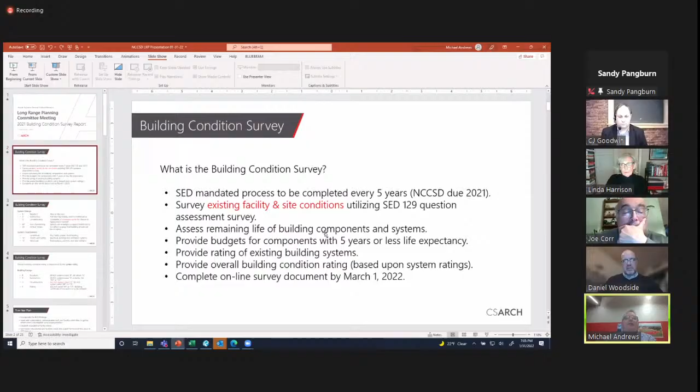Some of the ratings and things we're looking at: there's a system rating for different components of each part of the building. The systems that we look at are anything from play fields to heating systems to columns, foundations, windows, doors. We have to rate each component as E for excellent, S for satisfactory, which means it's functioning reliably with routine maintenance, U for unsatisfactory, which either means it's unreliable or it's exceeded its useful life and repair or replacement is needed.

It's non-functioning, or CF, critical failure. If you have a critical failure, that's about as bad as it gets. The district has no non-functioning or critical failures to report on, so we're in good shape with that.

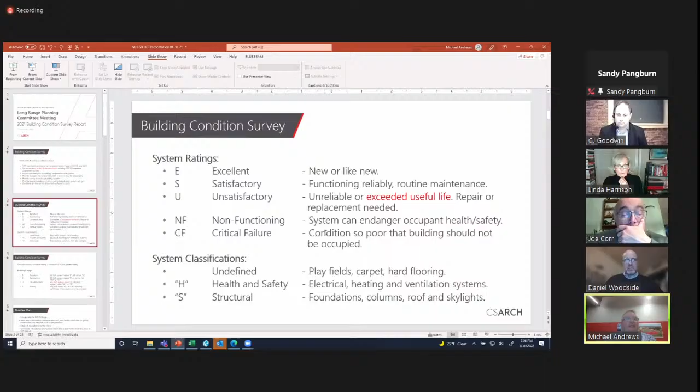System classifications: each one of the individual items that we look at, like playfields for example, are undefined - they don't have a classification - as either being health and safety related, like electrical, heating systems, and ventilation systems, or S as structural, which is for foundations, columns, roofs, skylights. So we look at the systems, and the systems are each classified in different ways.

The overall building condition rating is based on: excellent, meaning all health and structural items are rated excellent. All others are satisfactory - S for satisfactory means all health and safety or structural items are rated satisfactory or better. We have most of the buildings in the district rated satisfactory.

Next is unsatisfactory, which is if any single health, safety, or structural item is unsatisfactory - the building itself falls into an unsatisfactory category. And then failing, which is if a building has any health, safety, or structural item noted as non-functioning or critical failure.

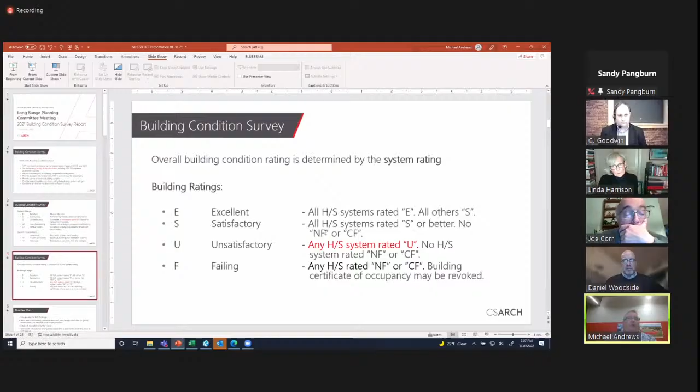If that were the case, when it gets uploaded to SED, they could revoke your certificate of occupancy, and that would affect occupancy of the building. Again, we don't have anything that falls in that category.

The 5-year plan: here we incorporate the building condition survey findings. We meet with stakeholders, administrative staff, and facility committees to gather information and establish work scope. We establish educational facility needs, synthesize them into a plan, and phase the plan in 5 years in an SED format. The executive summary, forwarded on Friday, is submitted to SED.

Along with the building condition surveys that we upload to the portal. So for the facility evaluation reports, which we'll go into detail on for each building, we base those reports on our building observations.

CJ and I walked all of the buildings with Brian Craft, and we looked at every nook and cranny to assess their condition. We also looked at the previous building condition survey as a guide to where we were and where we need to go, and reviewed the district 5-year plan.

That would have been the last one created in 2015, I believe it was updated in 2018. There are also conversations with district administration and staff carrying forward past educational and programmatic needs that may not have been met in the 2017 capital project, so we're still tracking those items to see them processed through.

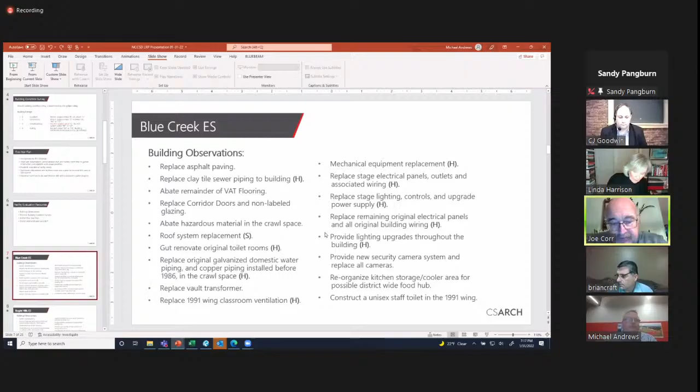Okay, so next building, if there weren't any specific questions at Forts Ferry, I'll go on to Boght Hills. I won't go into detail on a lot of the repetitive items. I'll just talk about some more specific ones that pertain to this building.

Boght Hills, for as long as I've worked for the district, has always had drainage issues in the playing field out in front. That area really needs to be corrected. We need to look at that system to see what we can do to provide better drainage. As part of that, we have an existing storm pipe running out to a structure in that area, which is an original pipe from the 50s that's asbestos lined. So that's a pipe that's going to need to be abated and removed.

We again have more VAT. Boght Hills is one of the buildings—there are a number of buildings in the district that have a lot of the popcorn texture plaster. I'm sure if you've seen it, you'd know the popcorn reference. It's on ceilings, soffits, exterior walls. It has very good acoustic properties, which is why it was installed originally, but it needs to go. We've been taking it out of any areas we found it in the last capital project. A lot of that has been through change orders that have been processed, but anything we've come across has been taken out in the last projects. That's the order we want to go through in future capital projects: if it's in a room, it's gone. There's no reason to keep it. So that's the marching order we're working towards.

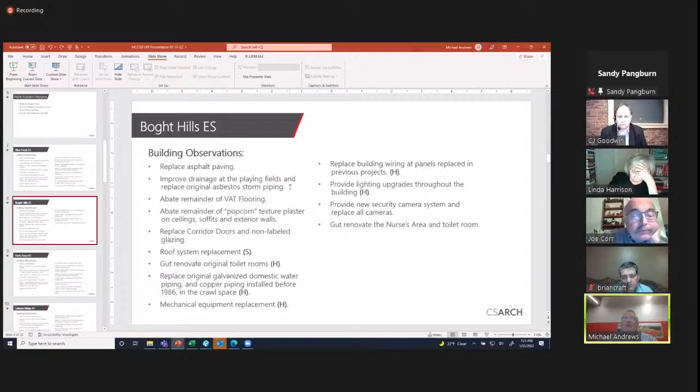There are also corridor doors that need to be replaced, roof systems, renovating the original toilet rooms again, replacing the original galvanized domestic pipe and copper older than 1986. There's mechanical equipment replacements, building wiring, lighting upgrades, security camera work. Boght Hills is also in need of a renovation of the nurses' area and the nurses' toilet room. We've done that in other buildings in the 2017 project—Latham Ridge has new, Loudonville has new, Forts Ferry has new. So Boght, it's their turn.

Any questions specifically about Boght Hills?

For Forts Ferry Elementary School, we have asphalt paving that will honestly always be on the list, because there will always be another section needing replacement in 10 years as things get phased in. So there are areas of Forts Ferry where the pavement does need to be replaced. We have the corridor doors, popcorn texture on the soffits, hazardous material in the crawl space, roof system replacement, gut renovation of original toilet rooms, and we're replacing the original galvanized domestic pipe. There's an old vault transformer that needs to be replaced, and mechanical equipment that needs to be replaced.

Stage electrical panels, outlets, and associated wiring are original there. In Forts Ferry, we also want to replace the stage lighting controls and upgrade the power supply. We want to bring this building up to match some of the other elementary schools with the stage lighting and control systems that have been provided in other buildings.

Replacing original electrical panels that remain, providing lighting upgrades, new security camera system, converting the boilers from steam to hot water and replacing the steam piping, and modifying the tennis court area into a PE instructional space.

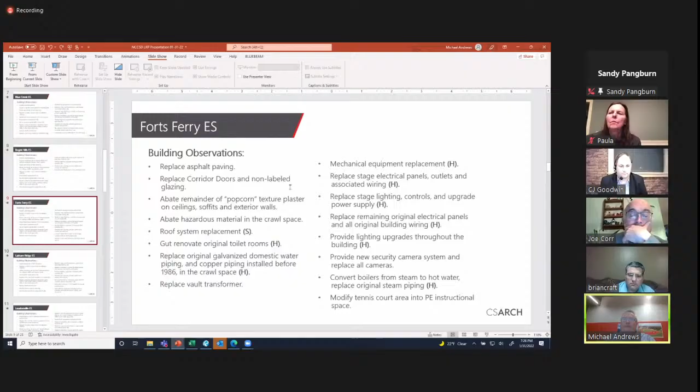So at Latham Ridge, abating the remainder of the VAT flooring, corridor doors, the popcorn texture plaster. There are some roof areas that need to be replaced. Just as a general note for the roofing system, everything that we did as roofing system on the 2017 capital project and moving forward is replacing the complete system down to the deck, evaluating the deck. If we have damaged deck, we replace it, but it's a complete system from the deck all the way up with new insulation. Everything that we do, we want to be sure the district has a 30-year warranty.

So everything installed in 2019, 2020, or summer of '21 has the longer warranties so those are soup to nut, basically brand new systems. We're not patching on top of an old problem. So the approach did change from past projects where we're chasing leaks, to really the system has reached its useful life. We're going to replace it with code compliant proper insulation, which also nets you better energy savings in the building. Because once you bring new roof, meet new energy code, and bring 5.5 inches of insulation up, you are increasing the performance of the overall building. So that's something we've been doing and would continue to do with the district.

At Latham Ridge, we have a vault transformer. In the kitchen, there's a grease trap that needs to be replaced, mechanical equipment replacements, replacing stage electrical panels, original electrical panels, lighting upgrade, the camera security system, and renovating art room 32 for updated program requirements.

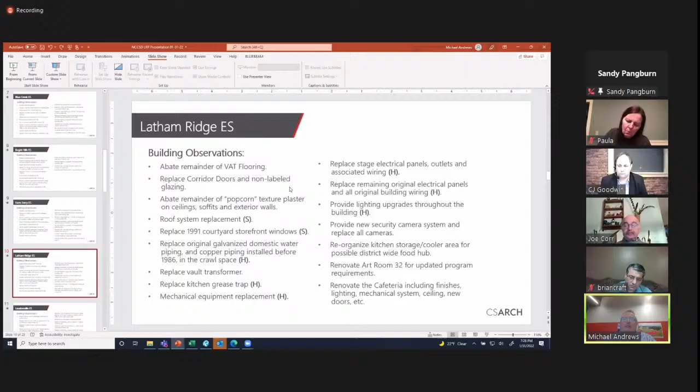And then renovating the cafeteria at Latham Ridge. The space is dated and would do better with updated lighting, mechanical systems, new doors, ceilings. It's a space that's ready for an update.

Any questions at Latham Ridge?

So Loudonville Elementary School, repairing and replacing storm damaged structures. These are catch basins that pick up rainwater in the ground. So these structures are some that need to be replaced.

We have an existing exterior site stair which goes from where the new main office is up to the playground area. That is not in great condition and should be looked at for replacement. That is a structural issue from an S category.

Corridor doors, there is still some popcorn texture. There is hazardous material in the crawl space. There are areas of the roof that need to be replaced.

So in the past project, in the 2017 project, when we've replaced or renovated specific classrooms that had the flooring, we did go in and provide a traditional VCT like we would in other floors. It's beautiful old wood flooring, but it's lived its life.

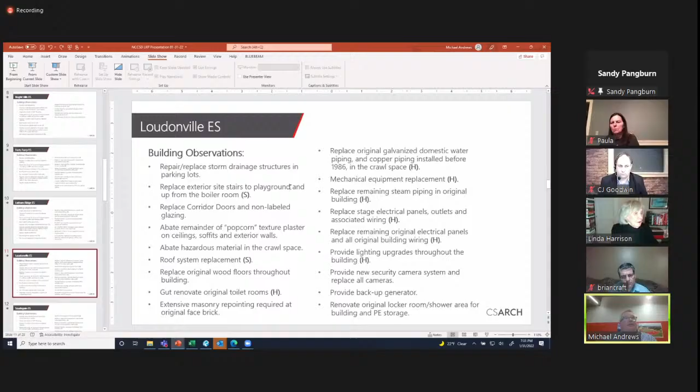Southgate Elementary School, we have repaving of the lower parking lot and tying the storm structures in the lower parking lot into the municipal storm system. Abating the remainder of VAT flooring, corridor doors, plaster texture, roof system, original toilet rooms. There is a cooler freezer at Southgate that needs to be replaced.

Southgate is, I believe, Brian, the only building in the district where we have VCT that was installed in the early 90s, which 30 years in now is showing its useful life. So we're pulling original VAT out of buildings from the 50s, and the replacement VCT is starting now, 30 years later, to show wear. This is the only building where we've had that, but again, the material can only take so much recoating and finishing. That's going to be something that, as we go on, is going to show up more in buildings 10 years, 15 years down the road.

Galvanized domestic water piping, mechanical equipment, stage electrical panels, original electrical panels, lighting upgrades. We have a grease trap that should be replaced at Southgate. And at Southgate, there was a request to construct a unisex staff toilet room in the 2005 wing.

Any questions at Southgate?

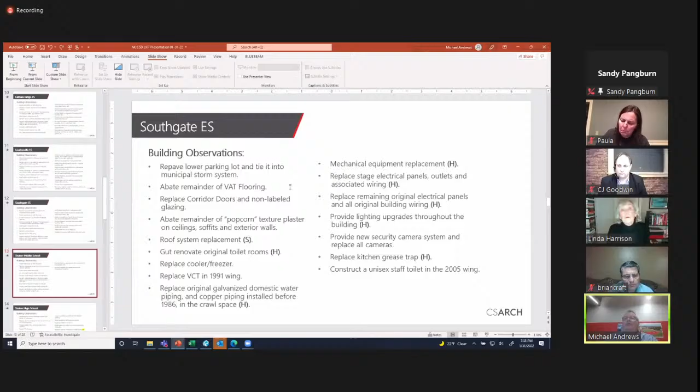Shaker Middle School: there are a handful of rooms left that have VAT. The majority of the building was taken care of in the 2017 capital project. There are some corridor doors and non-labeled glass that remain in specific corridors.

There is roof area that needs to be replaced, specifically over the gym and the library. Those areas weren't replaced in the last project. Also need to renovate original toilet rooms—there are a few of those left in the building.

Replace the 2000 vintage cooler and freezer. Replace original galvanized domestic water piping. There is some mechanical equipment replacement existing, and some original domestic water piping that we want to replace.

Building wiring that goes back to old panels. Some lighting upgrades in rooms we weren't able to capture in this project. A newer request was to provide multiple art display enclosures throughout the building, so there are places to present artwork in code compliant ways in hallways.

Any questions on Shaker Middle School?

Shaker High School is— Mike, can I just add one thing? When we're talking about replacing the piping in the buildings, the lead water testing made it obvious that Shaker Middle School, with the amount of work done, was our best tested building. We had one failure, and it was a very old faucet that was just left behind. So while not all of it was replaced, it was easy to see the work done made a big difference compared to the other buildings.

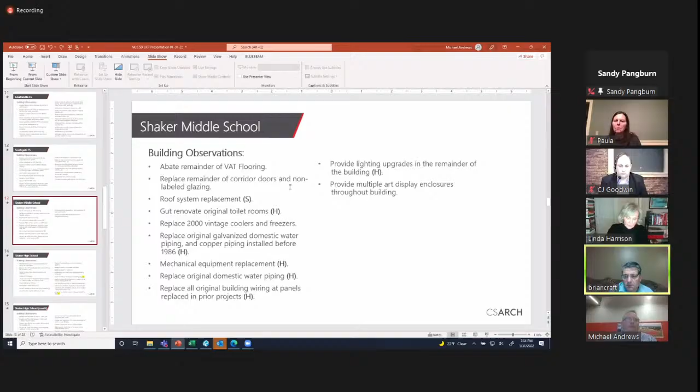For Shaker High School—Shaker High School had the least amount of work done to it in the 2017 capital project, so there are a lot more items from 2015 that are still carrying through today.

There is repair and replacement of storm drainage systems and pavers in the courtyard. There's repaving of the student parking lot and pavement near the receiving area. Replacing Walker field lighting system and controls—something we need to keep on the forefront of costs for the future.

Abating VAT flooring in a number of rooms. There is a considerable amount of popcorn texture plaster on ceilings, soffits, and exterior walls in the high school. There's also some transite panels in ceilings.

Roof system replacement is extensive. There's a lot of roof area that is in really, really poor shape at the high school.

Replace the skylight and curb at Taft Cafeteria. Renovate the original toilet rooms, replace corridor doors and non-labeled glazing, replace the existing dishwashing system, replace coolers 1 and 2, and replace the chairlift in the existing building lobby.

That chairlift is getting close to its useful intended life, so we should be tracking for that to be replaced probably in the 5 to 10 year range.

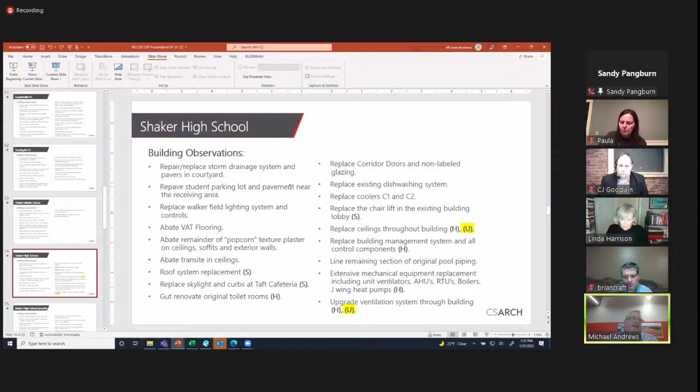Also in the high school: replacing the sanitary lines for areas C, J, and G. Replacing the sanitary line between the G wing and Lafollette Cafeteria. Replacing the transformer serving the front half of the building. Replacing all original building wiring at panels not already replaced in past projects.

Replacing the remainder of existing electrical panels and wiring throughout the building. Lighting upgrades throughout the building. Again, the domestic water piping needs to be replaced. Also the grease trap in the kitchen.

The next series of items are all things we discussed in long-range planning back in 2015-16. These items also came up in different conversations we started to have with long-range planning prior to COVID. So the items we were talking about at the high school, I've added to this list just to be sure we have them for tracking.

We had talked about gut renovations of the art rooms to meet current programmatic needs, creating new classrooms for photography and green screen filming, creating a large area for art gallery display, renovating the music rooms to meet current programmatic needs, creating a new large band and orchestra rehearsal room, and creating 4 to 6 new music practice rooms.

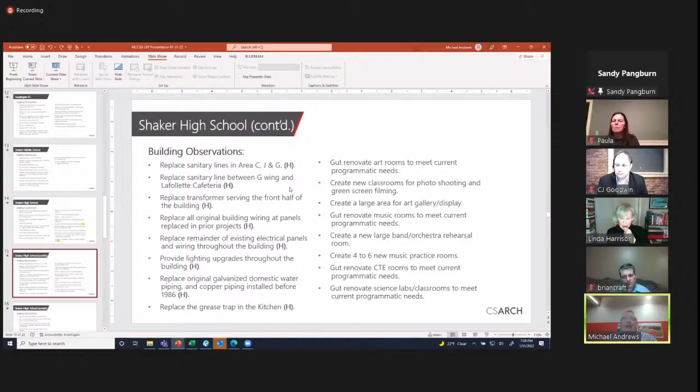Gut renovating CTE rooms to meet current programmatic needs, gut renovating the science labs and classrooms to meet current programmatic needs, gut renovating and enlarging the auditorium, and gut renovating and increasing the size of the toilet room near the auditorium for public use during events.

Gut renovate the H gym boys locker room to add storage and refurbish the toilet room, showers, and locker areas. Gut renovate F gym boys and girls locker rooms, and gut renovate home and careers classroom A138. We built an addition with two general home and careers classrooms in the current project, but we didn't do any work in their existing kitchen spaces. So all of these educational need items we just discussed are really continuing the programs that were developed and how spaces were renovated in the middle school in the last project, and bringing some of that into the high school to keep that going.

Are there any specific questions at the high school? I have a question, this is Paula. Maybe it's been a lot longer than I thought. I think you said something about the chairlift - is that the same thing as the elevator that's in the lobby?

So there's an elevator in the high school, which is in good condition. Right, it's a chairlift in a glass box in the lobby of the high school that I'm talking about - the original lobby. That's different than the elevator. I also think, Paula, you may be thinking of the middle school, where we did replace the elevator there. No, we did the high school - maybe it was longer ago than I'm remembering, but I do remember that we replaced parts of it, or the whole lift, in the lobby of Shaker High School.

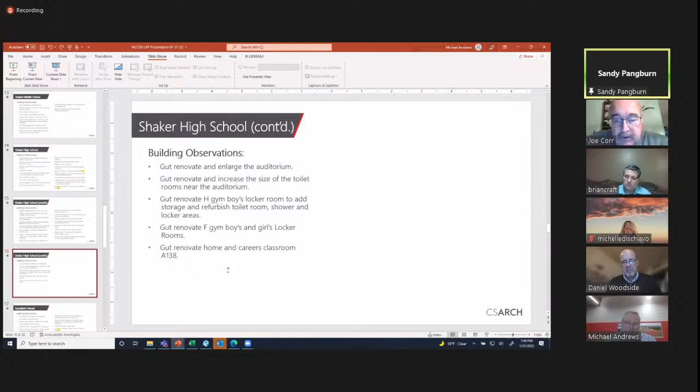And I think, Sandy, what we really need to do is reorient our thinking. Some of us have been around for a long time, and for a long time we avoided bonding until 2017. But other schools almost universally run smaller bond projects, 20, 30, 40 million dollar bond projects, where they address these issues periodically every 3 to 5 years. I think we really have to adopt that modality rather than looking at our previous model, which was to maintain that transfer to capital fund. But you can never keep up with your buildings the way you should by doing it very incrementally, very little bit.

Yeah, I hear you, Joe. I know we had a methodology where cash was king, and we tried to do everything with cash. And I'm personally supportive of strategically using financing, bonding when it's necessary. Yes.

So yeah, I'm supportive of that. And I think that's probably how we have to, not probably, it's definitely how we have to look at this particular set of circumstances, especially when you're starting to talk about major systems like roofs and electrical systems and water systems.

I would just further support what you're describing, because that's something we're seeing more and more of with districts that we're working with: $15 to $20 million projects every 5 years. The reason the 5-year window is discussed is because that's when your maximum cost allowance is also recharged by the State Education Department, so your aid is maximized at that point too. It falls into not only a building condition survey window, but an aid window, so getting into a cycle like that would make a lot of sense for you as a district.

And then, going to your point too, Sandy, there are major programmatic initiatives that need to go to Shaker High School. Remember when we went in 2017 after our first defeat in December of 2016, we essentially, not eliminated, but scaled down significantly the work on the high school. So I know Mr. Bogart presented, but there are needs in math, science, technology, and art that we do also need to address programmatically as well.

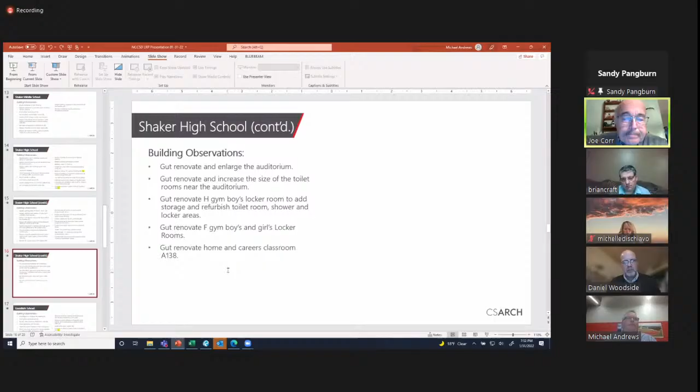Okay, so I'll go on to Goodrich unless there are any other questions about Shaker High School.

So at Goodrich, there's repaving, there's roofing, there's replacing steel windows and abating PCB caulk. There is some remaining VAT flooring. There's some hazardous material in the crawl space, some popcorn texture plaster on ceilings and soffits. There are mechanical equipment replacements required for unit ventilators, exhaust fans, the air handling unit in the boardroom, and all mechanical systems in the original building. We're also replacing the remaining pneumatic controls with a new building management system.

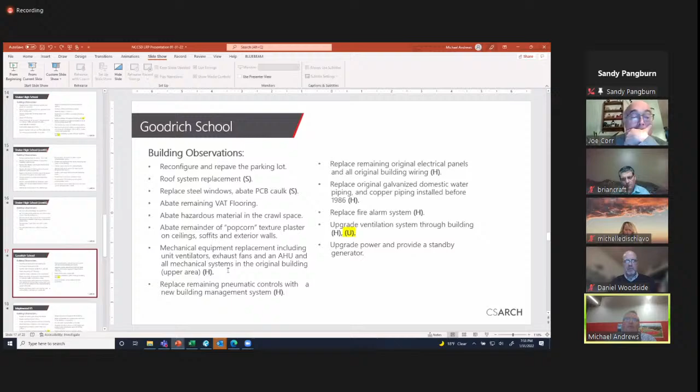Replacing the original electric panels, galvanized domestic water piping replacement. That building's fire alarm system does need to be replaced in a future project. Upgrading the ventilation systems throughout the building, specifically the areas in the upper portion of the building on top of the stairs, which need updates to the ventilation system. From an SED classification, that categorically put the building into an unsatisfactory rating. There's also a need to upgrade the power and provide the standby generator that we mentioned earlier.

At Maplewood, there's quite a bit of work: replacing the 12-inch storm pipe at Erie Street, repaving the parking lot and drives, creating a secondary vehicular exit from the property, abating hazardous material in the crawl space. There's a lot of interior plaster wall and ceiling repair that should be done, and the roof and skylight system replacement. The roofing is as bad or worse at Maplewood than it is in areas of the high school. It's the only building where the roofing condition actually pushed it to an unsatisfactory SED classification.

As a programmatic need, the building should have an elevator for access to the second floor. Replacing the stair treads, the original ones are in very poor condition, and the balcony guardrail is not at the current code-required 42-inch height. That is also an unsatisfactory item that would need to be corrected.

All of the windows should be replaced in the building. Corridor doors are in poor condition. Flooring throughout the building is not in good condition. There is vermiculite above the ceilings in the attic system, so to get there and do the work, you're replacing some impacted non-ACM building components by doing the abatement. There are original toilet rooms that should be renovated. The electric service to the building needs to be upgraded; we're recommending 1200 amp service.

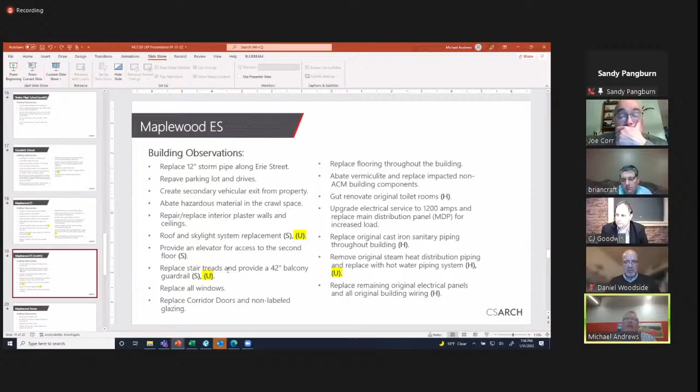There are original electric panels that need to be replaced, lighting upgrades throughout the building, galvanized domestic water piping needs to go, security camera system, mechanical equipment replacement including original radiators, some exhaust fans and air handling units. Ventilation in the building needs to be upgraded. That pushes this building into unsatisfactory, and the fire alarm system is at the end of its useful life, which is another unsatisfactory. A programmatic need we listed is the building is without a kitchen, so if the district is going to continue using the building for academic or leased educational purposes, it's tough for a program there without a kitchen that can support the student load.

Any questions on Maplewood?

I have a question for Joe on Maplewood. Are we required to continue to own that building for any reason? I want to make sure I heard you, Sandy. Are we required to own the building? Is there some, I don't want to say that like I'm suggesting this, but could we sell that building if we wanted to? Yes, we could.

Any other questions on Maplewood?

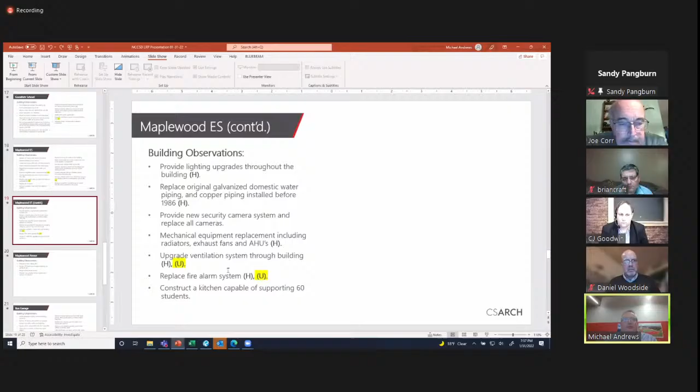So the Maplewood Annex, there's minor work there that needs to be done. That building altogether is in pretty good shape. There are some plaster ceilings that should be replaced, a recoating of the roofing system, some repair of exterior stucco and stone veneer, and the building could use a new security camera system and new cameras.

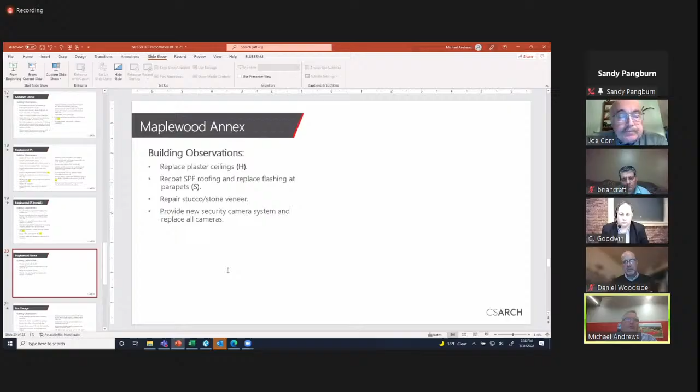Any questions on the bus garage?

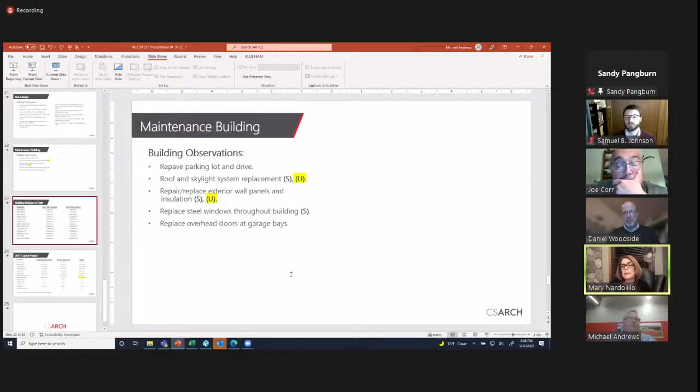It's been favorably readjusted. Mary, Scott, do you have the latest on that? The unenhanced is in the 62% range off the top of my head. And Mary, that's a very positive move because we were around 49, 50% unenhanced.

So this is a very favorable outcome. So Joe, that said, what are our next steps? I think we have two components here: the building conditions, the maintenance and the upgrade and repair of systems, and the programmatic piece. So the next steps would be for the leadership team to come up with a priority listing, as Mike said, to roll out a 5 or 10-year plan, and then come up with a proposal for financing that.

It would be looking at perhaps a bond, perhaps using some or all of the capital reserve or reserves. We may be talking to you about increasing or starting another reserve to help supplement and defer the cost of it. It would be to actually put down the plan and talk about what we're going to do and how we're going to finance it and when we're going to do it.

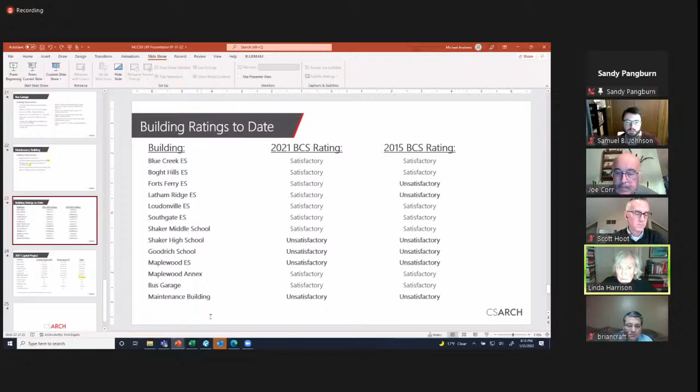Are there any other questions? I don't think there are. All right, thank you very much, Mike and CJ and Dan. And certainly thank you, Brian, for your leadership as well. It's very important to have someone like you leading the way for North Colonie.